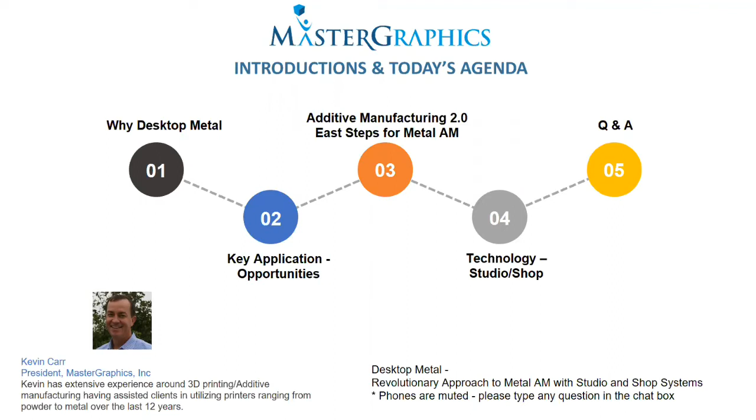For those who don't know who MasterGraphics is, we're Midwest based and cover the central part of the US, down to Missouri and those type of areas. What we're really focused on is working with our clients to effectively adopt 3D printing internally, everything from prototypes to production. Our emphasis over the last 5 years has really focused on production, because that's where we see the biggest opportunity for the next growth.

Where we see our solution set and expertise help customers is shortening time to market and reducing cost. We also see a big struggle out there trying to weed through what is hype and what is reality, so we really work with clients to make sure they can effectively utilize 3D print, and if it's overhyped, we'll let you know. Of course, the current one since COVID is how to address supply chain challenges and improve innovation.

We see these as the core challenges that additive can help improve in your business, and we start with a defined process. I'm pretty passionate, as the owner of MasterGraphics, about walking you through what are the pains you're looking to solve, does additive make sense, what's the ROI. Sometimes we figure out it's not a fit, but we have a pretty defined process. We're fortunate to represent great companies such as HP 3D, 3D Systems, Ultimaker, Dimension, and now Desktop Metal.

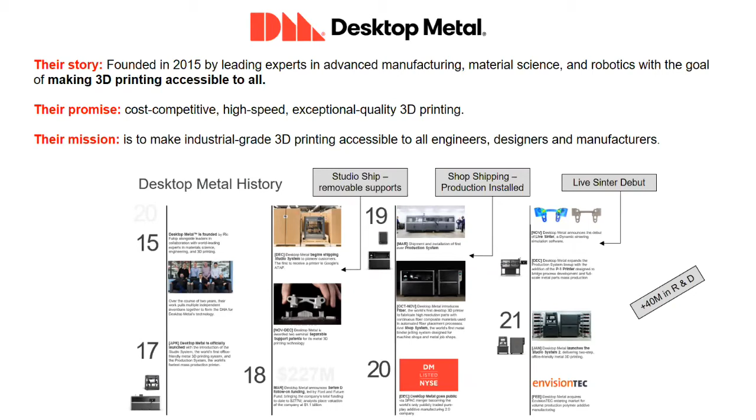I encourage you, if you look at them on the stock exchange, one of the biggest things that excites me about Desktop Metal is the amount of money they pour into R&D. In 2021, they will put over $40 million into research and development for the product. That excites me because we are just at the forefront of what they are going to do, and it's why they can create these amazing products—they're investing a lot of money. Compared to traditional 3D print, it's a substantial amount of investment.

So from a high level, they have 4 products, and again, adding more with EnvisionTEC.

They have a product that is a composite with carbon tape built in. Even though it's a composite, it's strong, almost like aluminum. Many of you are familiar with Markforged products—this is designed to compete in that space, making very strong plastic parts. I'll talk a little bit about the studio system in a minute.

It is designed to be an in-office metal 3D printer. So no need for special rooms or special environments—you can literally place this in an office environment and be creating 3D metal parts.

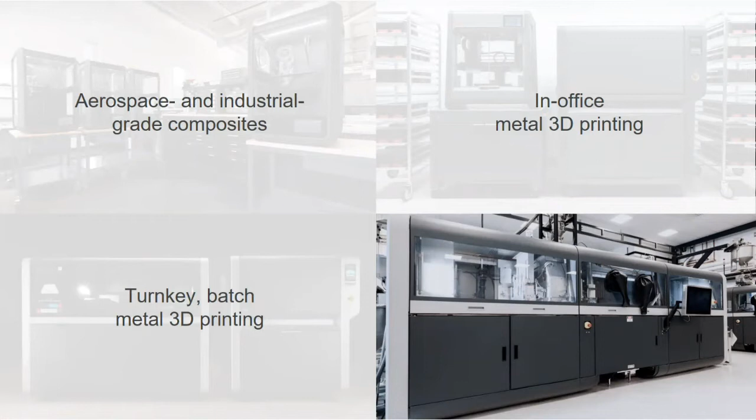As I mentioned, then you get into the shop system. Now we can up the game and do more batch printing with metal. It's a total turnkey system that allows you to print into powdered metals so you can really increase your throughput and improve your ability to print geometries.

Probably from the original start of Desktop Metal, they developed a very unique high volume metal 3D printing system. This is a niche product in a lot of cases, but for those looking to produce high volume metal parts, Desktop Metal is someone you want to talk to. As a reseller, we fit in the first 3 quadrants, but for that last one, if you have questions about getting into truly high volume metal printing, I can connect you with Eric.

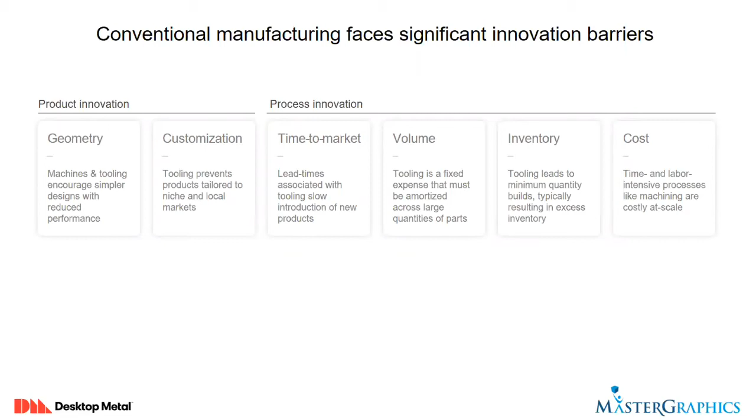So when we're bringing on technology, what does additive do, where does it fit, and why would customers bring this in? If you look at the first one, I love talking about innovation.

Additive truly spurs on innovation. I've been in the print world for 30 years of my life, and print always added—people needed it, it was a requirement, you needed to print documents to assemble. But 3D print truly, for those early adopter customers, allowed them to be more innovative. Looking at the first column, it's geometry—machining and tooling really require simpler jobs, the simpler the better. Whereas with additive, we can optimize the design. Think of generative designs, think of lightweighting—that's one of the big advantages of additive.

Then, of course, you get to customization. In typical tooling, you have to retool or reprogram to do things specific, but with additive we can do mass customization. You're already seeing it with dental implants, with people like Invisalign. Customization continues to be a push by consumers, and you're going to continue to see it in automotive. Customization at a mass level was not really an option until you got to additive.

And then, of course, we talk about process innovation. This gets into time to market—you can get to market much shorter when you can either produce parts faster, the final part, or produce prototypes.

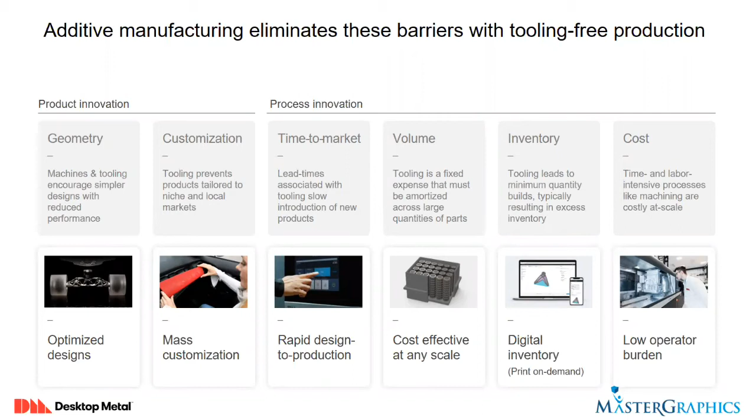And where I'm really excited, as I mentioned, is bringing on desktop metal because of what they can do. This additive 2.0, we in the past sold some 3D print metal technology from 3D Systems and that type. But where I think desktop metal is uniquely positioned is they are making their systems accessible to everyone, getting back to the need of not having a specialized room or specialized trainer.

One of the advantages desktop has is the fact that they have a very closed loop system. From start to finish, you follow that part from the printer to the sintering station, and it's a closed loop, doing all the calculations for us. And if you can even see from this operator, just the user interface that desktop has created makes it very usable by just about any user.

And then, of course, you get into high volume manufacturing. One of the limitations additives had around metal is really, you could print 1 or 2 parts and maybe get them out, or if you were using a laser-based system, it was a little bit slower and expensive. But now we are bringing more high volume metal manufacturing to the market.

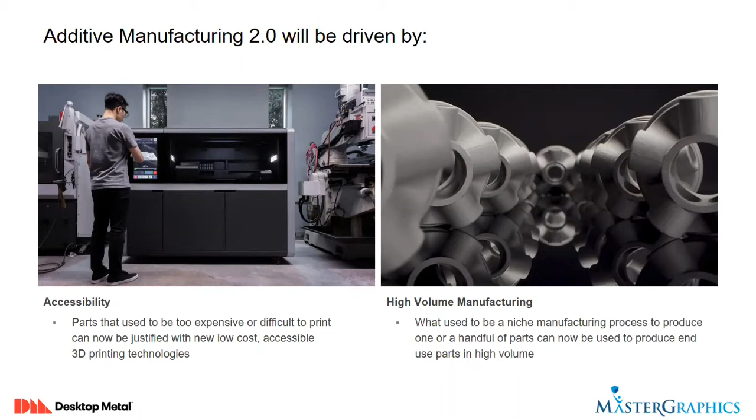The other thing that has changed over the last 3 years is the finish. We continue to see better improvement in the way the parts are finished and just the overall how they're coming out of the machine. Of course, accuracy, I'll talk to that a little later, how it compares to casting and MIM. Properties, always important when you talk about metal printing, is having isotropic, the right density, the right type of part so that you can use it as a metal part.

Desktop's metal technology all has isotropic and material properties, and then cost and speed. If you look at where this has been driven down, the speed keeps going up, the cost keeps coming down. So now ROI is much more attainable than in the past.

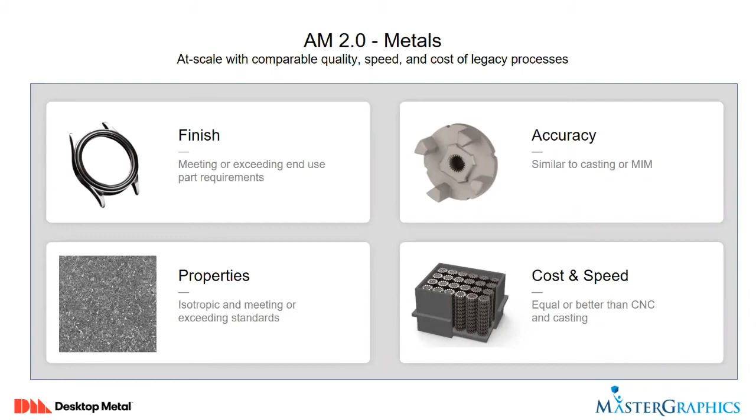Real quick, just to let you know, desktop's technology is really based off metal injection molding. Very similar to what MIM is, it's basically a powder process where you create a mold, put the metal powder in, and then sinter it. Desktop really took that MIM technology that's been around for years and years, well proven out, and built an additive process around it.

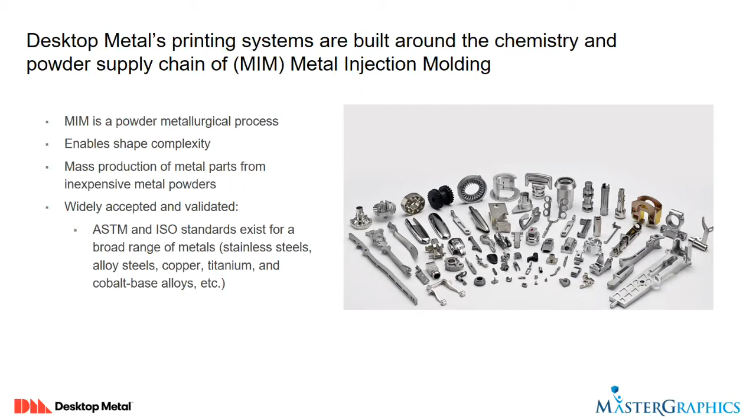Many of you as manufacturers are familiar with MIM, used for very specialized tooling and geometries that are hard to machine or impossible to machine. That's really what they took — they took the MIM process and created their 3D printers.

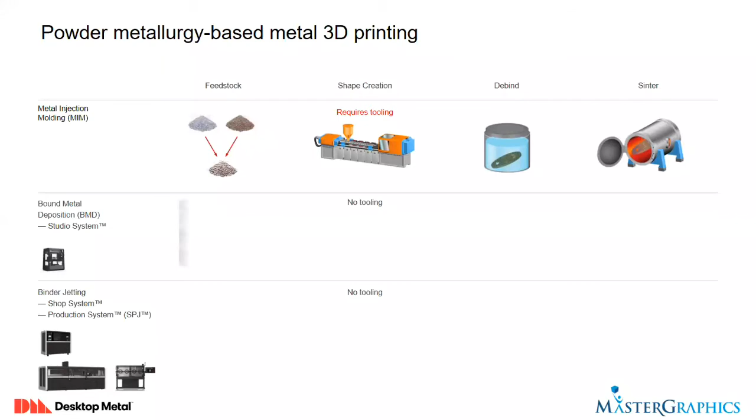The advantage is the ability — if you follow a MIM process, you've got to tool up for that, feed the stock in, debind it, and sinter. Now with technologies such as Studio and Shop, we can basically print that part with no tooling, remove the supports if needed after sintering it, and we're basically doing it in one process.

By far, the one thing we're seeing across the board, especially in the Midwest, is just the time to get either jigs and fixtures or parts is months out. If you're waiting for a mold or waiting for machine time, everyone's busy. 3D and additive really brings the ability to push and print, and in a very short time get the part you want.

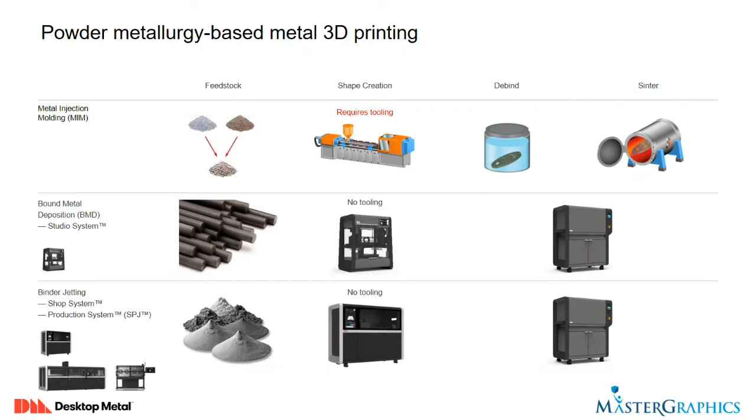So I want to just highlight where the product portfolio is. I'm going to focus in on Studio and Shop today, but of course this is the desktop lineup. They have Fiber, which is a composite printer, but you can print parts that act like aluminum and steel.

And then, of course, you have Studio. I'll get into that, kind of the entry-level, office-friendly production printer. Then you get into Shop. I'll tell you that one of the main reasons I signed up with Desktop, and very fortunate that they agreed to let us, is the Shop system. I think it's completely revolutionary compared to other technologies out there.

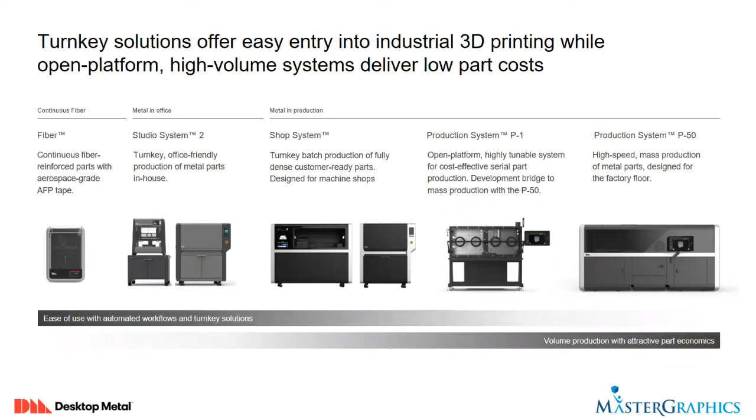And then, of course, Desktop has a specialized production unit. Again, this is where you get high volume, high value parts. This is one of the unique things about them - they really have a broad portfolio. As I mentioned, based on their growth trajectory, they keep acquiring technologies and porting it. You'll see a wood printing technology coming out from them, which at first I didn't really understand, but it's a very unique product that I see a lot of applications for now. And they just bought a technology that will actually print using multiple metal powders in one print.

So the other question comes, okay, what's the volume we're talking about? This gives a slotted chart of where it fits versus traditional manufacturing. Of course, their high volume is really geared to print hundreds and thousands of parts. That technology is way above my head, but it's pretty amazing what it's doing.

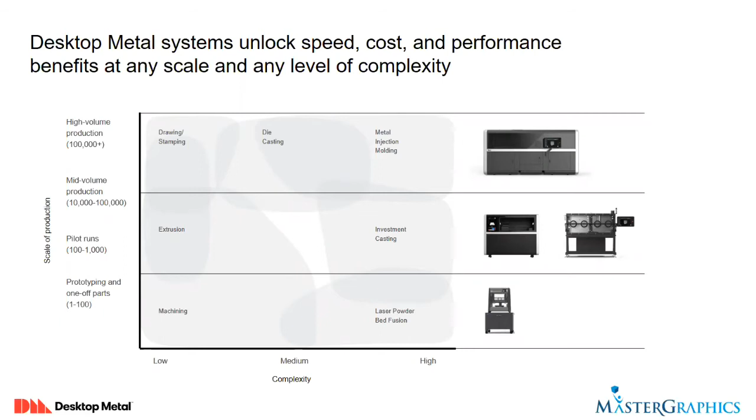And then if you take the Shop system, that's where we get into either pilot runs - gap printing of parts until you get your regular tooling up - or actually running mid-volume production can be done on the Shop. And then, of course, we'll talk about the Studio where you can do prototyping or one-off parts at a very affordable and effective range. So really, this is the other interesting thing about Desktop - they have a solution to fit your pain, which is very, very beneficial.

So the first product I want to talk about is the Studio system. Again, them and Markforged with the Metal X were kind of the two that generated this technology. But the great thing about this is they've eliminated it to a two-step process. In the past, what would happen is you would print, then you'd have to remove some of the material in a debinder, then sinter. Now it is a two-step process - you basically print and then sinter.

In the printing process, most people are aware of FDM or FFF - it basically just builds that part just like a regular FDM, FFF printer would do. It prints that part with support structures. You take that part, you sinter it, and you have your actual metal part.

The interesting part that Desktop also does is, as I was talking earlier, normally if you take even a laser sintered powdered part, you need to use an wire EDM or something to cut the part off of the base that it's building on. In Desktop's technology, they can actually break away the support.

So I would say this technology is great for jigs and fixtures. I actually, at the beginning when it was first launched, quite honestly missed all the number of applications that can be used. Think about parts that are hard to tool up for - now you can print them and do geometries. It's designed for the office - no special environment needed. You can put it right in a typical environment, and I'll talk about the separate support and a pretty wide range of media.

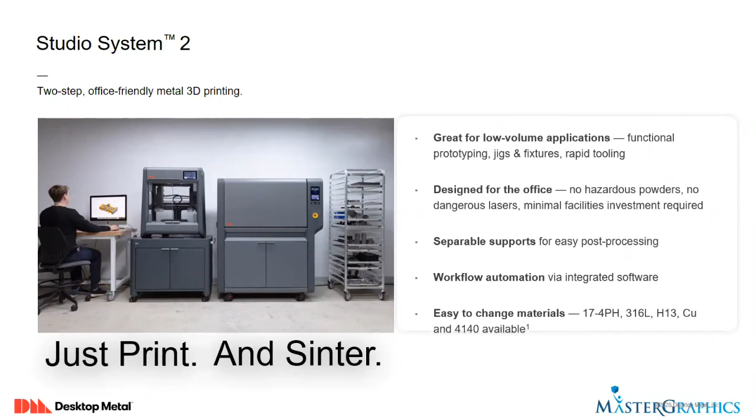So as I mentioned earlier, it's simply print, right? And it just prints it layer by layer, just like any additive process. If you look at that part in the first stage, the bottom part is actually the support structure. You see some support structure in the middle of the cavity.

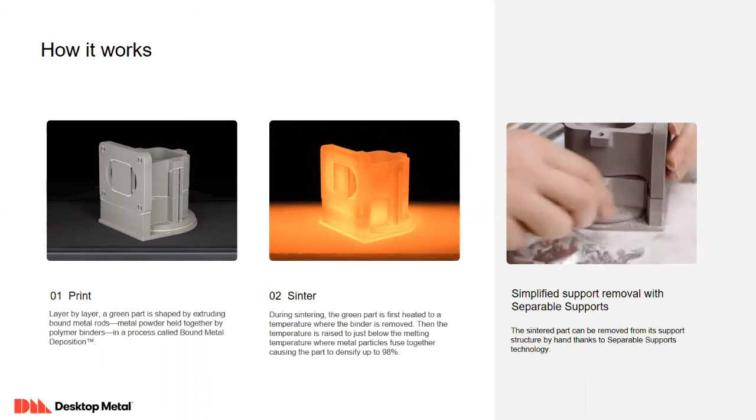Then basically when that part is done printing on the printer, you move it over to the sintering station. Basically what you're doing is removing any of the non-metal powder, and you're sintering to make that part solid. Again, this is very typical in MIM as well, where you're taking a powdered part and putting it in a sinter oven to make it solid. And as you can see on the right, one of the biggest advantages Desktop has is there's no cutting off of the parts - it's basically a simple, separable, removable support.

Again, very revolutionary, and the overall output and quality has been pretty amazing in what we're seeing from that perspective, and there's a wide range of things.

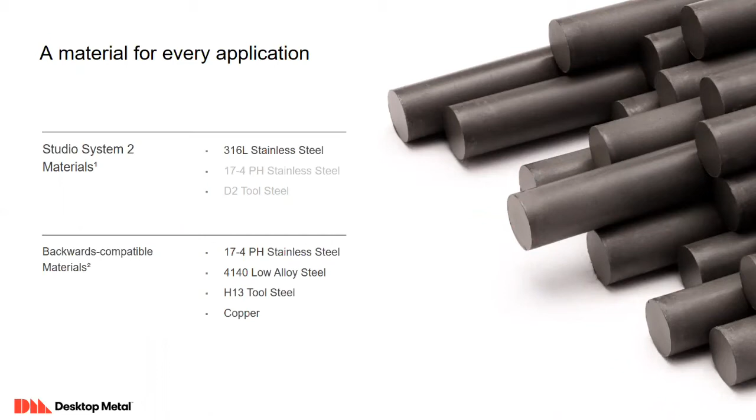So the new technology where you can basically go print to sinter, currently is 316, and you'll see the roadmap for 17-4 and tool steel. You also have some other technologies like 4140 and H13 and copper that you can print. You still have to debind it, but that's just an additional step.

So one other advantage of Studio is you have a wide range of metal material, and you can actually see the stock there. That stock is basically metal powder formed so it can be deposited through a print head. As I mentioned, the key features are the two-step process, and of course the software controlled workflow. I can't stress this enough.

The interface and the ability, it really is a closed loop system. When you create a part, the data goes over to the sintering station. It knows what it needs to do, what it's sintering. It sets the parameters, and off you go.

Of course, the smart separable supports are hugely beneficial. You don't have to cut them away. The hardware and the software are totally user-friendly, and you can even look at customized settings.

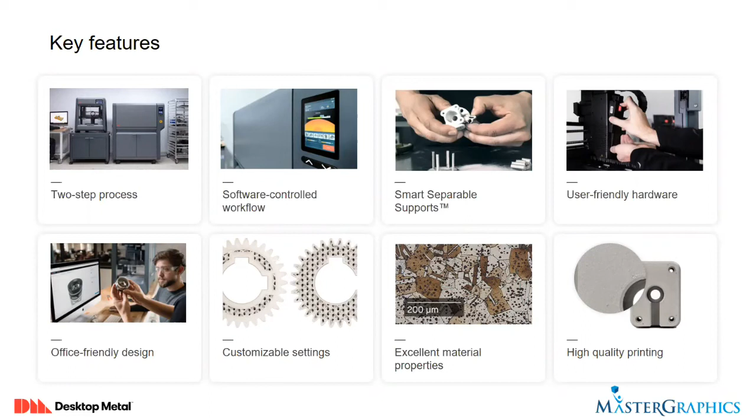So one of the other advantages of 3D printing is you can actually set infill at a different rate. This is used for lightweighting, for reduction in material, but you can change the type of infill based on the part. And then overall, excellent material properties, high quality printing. We have a couple different print heads based on how accurate or how small a feature you want to have. These are just some examples printed off the Studio.

As I mentioned earlier, I think even at the beginning when this technology was launched by the likes of Markforged and Desktop Metal, I really missed some of the applications. If you take that bracket, you can do some very unique geometries. Just think about trying to machine that up. There's no machining. You're going to take that CAD file and print that out.

So I encourage you to look out on your shop floor, look at parts you're producing, and say, hey, is this a part that I can create? The impeller is another very cool one, that would be near impossible to machine out effectively.

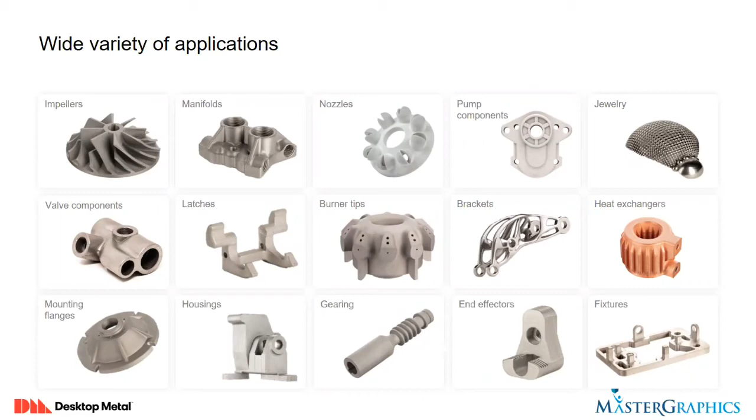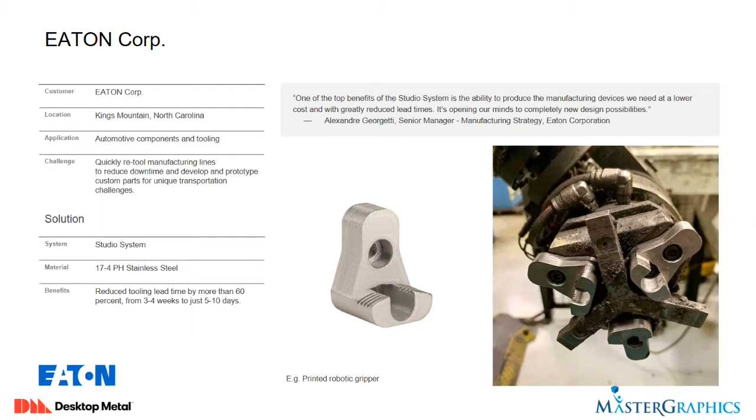This is an example of Eaton Corporation, where they're using the Studio system to create this tooling. Think of the time, as you're basically taking that CAD model, hitting print, getting your parts, mounting them up, as opposed to waiting for machine time, programming it, and setting out. As you can see there, it reduced that lead time from 3 to 4 weeks down to 5 to 10 days.

And that is really one of the key advantages, not only about the geometry and material advantages, but the ability to print a part. As I mentioned earlier, this is why I signed up with Desktop, because the Shop System to me is completely revolutionary. It is what's going to bring powder metal printing to the masses, in my opinion.

So what this is, if you talk about the original Studio, it's more of a print process where it's printing through an extruded head. This goes to a powder process.

For those of you who've worked with MasterGraphics, we sell HP 3D, and that's what really revolutionized the composite space, because with HP's technology, we're printing in layers. Think of it in a raster format as opposed to in points. So on the HP side, our volume for parts has shot up to the point that we're manufacturing final use composite parts. And to me, this is what metal powder allows when you're doing it by layers.

And to the point, before Desktop came out, many of the powder-based metal printers were very hard to use. You had to have a controlled environment.

You had to have very experienced key operators. This is where it's revolutionized - just the screen alone, the interface is absolutely crazy. So this is scalable, it's cost effective.

It actually fits in the price point of what we sell. A lot of our HP 3D print users are buying from the HP side. As I talked about earlier, it absolutely reduces lead times. It creates high quality, dense parts, and it's a true turnkey system.

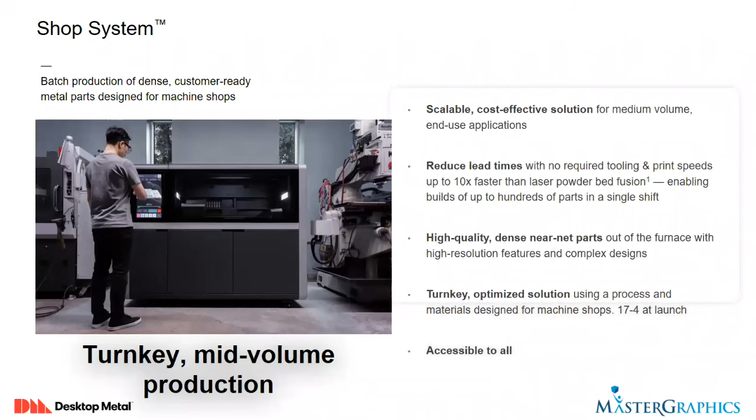So I just want to quickly go over how the shop system works, and it's the middle section. As opposed to printing in points, what it actually does is it deposits the powder and spreads a thin layer in one pass. This is actually a little different than even our HP, because what our HP does is it brings over the powder, compacts it, and then prints it. This in one pass lays out the powder, does a very fine layer, and then deposits the binding agent to solidify the part wherever you want it.

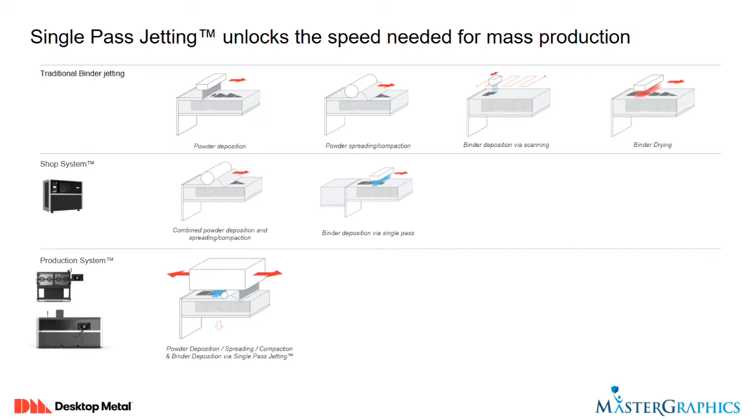So think about the speed increase versus if you're trying to cure metal with a laser - you have to trace the whole part. In this case, we're actually doing it in one layer. So our print speeds are incredibly fast.

How does it work? Much similar to Studio, except now our throughput is greatly increased. You basically print it in the printer, and it dries because it's actually a binder doing it. They call it cross-linking - it then gets the powder, so it's cross-linked together. You depowder so that you have your parts, and then you put it in the sinter oven.

Again, what I can't express enough is this is a closed loop system - it's Desktop that created the sinter system. A lot of times in metal printing, if you had a powder system, you had to go get an Elnik furnace, you had to do some other process. This is all in one, in a closed loop system.

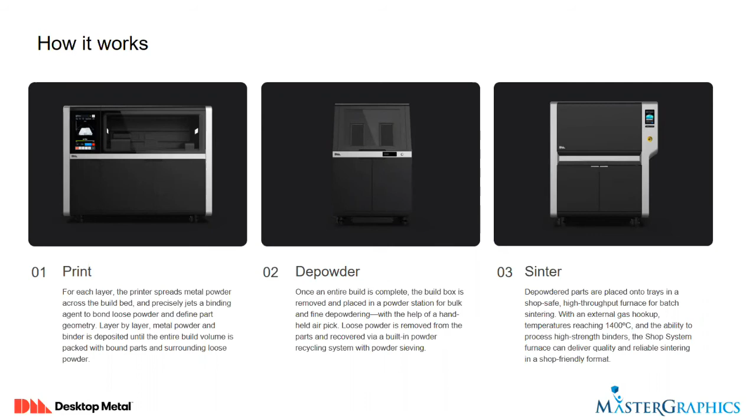So the ability to operate this - I don't want to say dummied down, that's not the right word - but it's much more feasible for customers to implement. So I keep harping on it, the turnkey system is obviously much faster than laser point processing. You can actually see where the little light is in a laser - even though lasers move very fast, you can't beat printing by layer.

Of course, again, much like HP technology, it has high resolution printing. Because you're dropping drops, you can actually control it, in a lot of cases better than you can a laser. And this is the other thing I've learned as we've gone from our 2D print world to our 3D print - jetting has a lot of advantages because of the way we can control the droplet size. And of course, there's redundancy in the print heads, much like HP. If you have a nozzle clog or whatever, it's smart enough to figure that out.

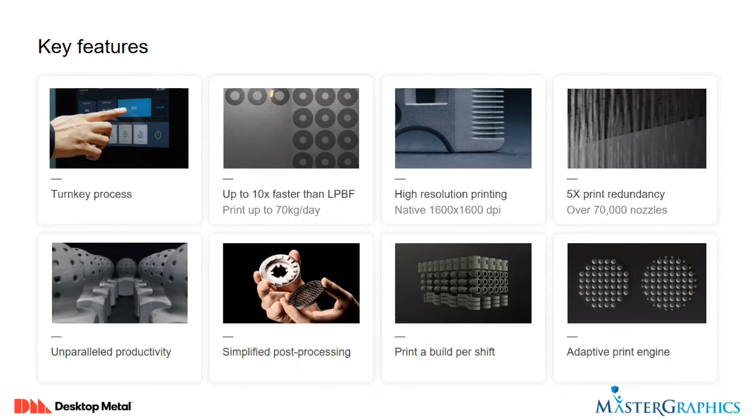As I see down lower, the simplified post-processing - same thing, break off supports. It's not very difficult to build supports in and actually break them off. And then of course you can build a set and build in a box, and I'll talk about that.

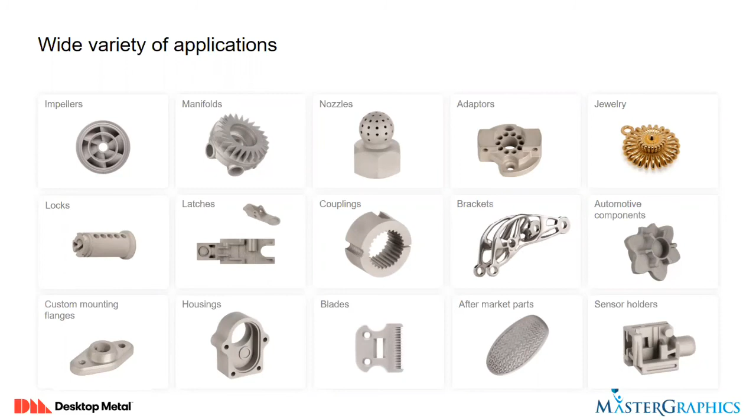But as I talked about, printing in powder has some very unique advantages, not only speed, but the ability to pack. Again, it's very similar to what we have revolutionized with HP 3D - we can build a box of parts, and we can either do mixed parts, as you can see in the first one, we can do batch parts, or we can do mid-volume production, the same part running over and over. We actually see this and have experienced this with HP 3D, very much a mix - you can use the machine based on the workflow needed.

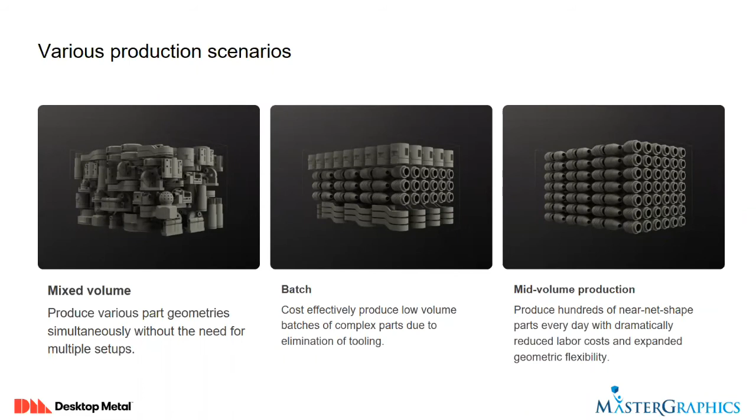Sometimes we're seeing prototyping, sometimes we're seeing production. But the key thing is, because the powder becomes part of the support, you can build in that whole volume and you're not limited by the support structures. So that's really another thing that continues to make the advantages of powder printing.

For those of you who know, we have a great relationship with D3. They have a great tool. D3 is an Autodesk reseller. They utilize Fusion 360 and do support on it. I'm amazed at what Fusion 360 can do from a generative design standpoint.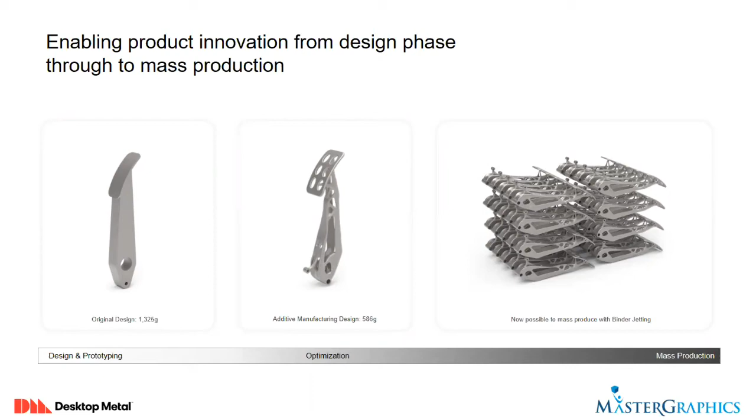That you just can't do with traditional manufacturing. And of course, you can see that mass production. Here's another example of that fuel swirler. Again, this gives you a cost of about $5 per part. But just look at that part - it would be impossible really, or very difficult to machine. Impossible, I guess would be the right word. But look at the throughput you can get on the shop system.

All of this for really what is near the price of our HP production composite printer. So this is what excites me. I think most of us in the industry always talk about metal printing being the holy grail. And I just look at what Desktop has done here. It excites me why we brought them on as a partner, and quite honestly invested in a shop system just as a demo so that we can understand it and show our clients.

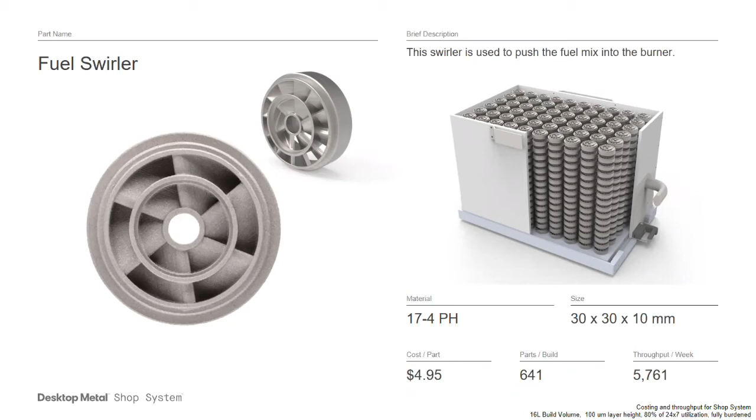So the last thing, I keep highlighting the production system. Again, this is kind of Desktop's foundation. This is truly a single pass, high volume, very cost competitive system. This is not an entry point printer, but to me, they are a market leader when it comes to production systems. And just to be candid, HP is working on technology - not quite similar, but again, this is kind of the future of metal printing at high volume.

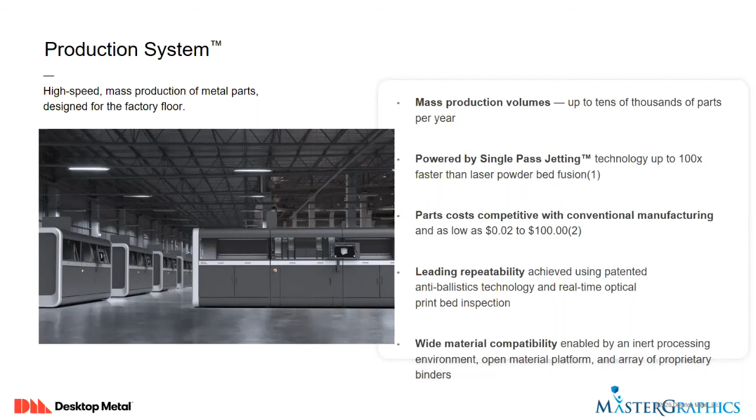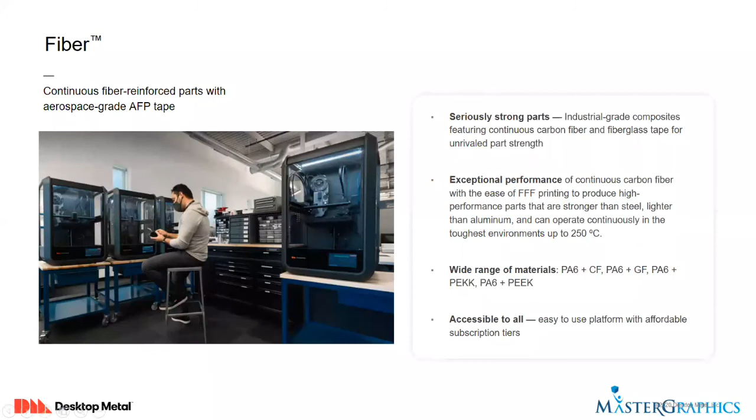And again, if you have an application you think could work, I can connect you with Eric. And then my last one - I just wanted to point out, they are launching this fiber system in the third or fourth quarter. What this allows you to do - it's a low cost entry level system, but because of the inlay carbon fiber, you can make parts that are very strong and work like aluminum. A lot of jigs and fixtures, that type of thing, we see done on that for sure.

Let's see, my last slide. Oh, and this is just to show, again, Desktop Metal - it's almost hard to keep up with what they're doing, right? In the last six months or year, they acquired EnvisionTEC. You can see EnvisionTEC's strength was really composites - they could do production type plastic printing as well. And then of course, the wide range of Desktop Metal parts.

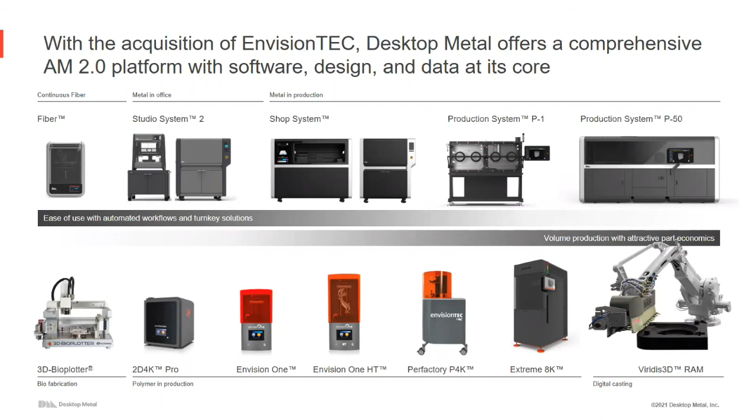And so they're going to continue to expand this portfolio. I say that's one of the advantages that we have at MasterGraphics - I believe in bringing on best-in-class 3D print manufacturers. What it allows us to do is go into our clients, see what their pain points are, and more times than not, we have a product that should fit. And again, we're also open to when we don't have a good fit.